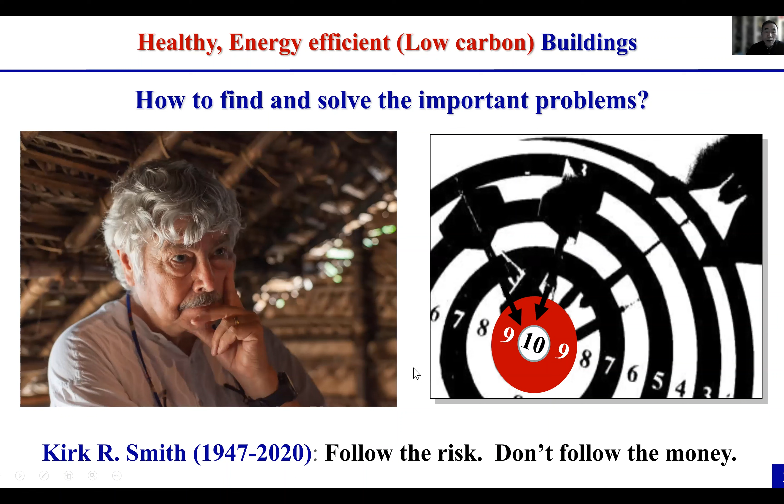There are three parts. The first part is background and problems. In creating healthy, energy efficient buildings, we should find and solve the important problems. How to find them? Kirk Smith said, follow the risk, don't follow the money.

In indoor air quality control, there are four fundamental problems. According to a paper published in Lancet 2020, premature death in China due to PM 2.5 and ozone is over 1.8 million, taking about 28% of the global value, ranking first in the world, and most exposure is indoors. In fact, there are more indoor air pollutants and more diseases. Therefore, the indoor air quality problem in China is a big problem.

There are four fundamental important problems. The first is what pollutants to target. The second is how to control them in design stages. The third, how to control them in the operation stage. The fourth, how to evaluate the effect of the control.

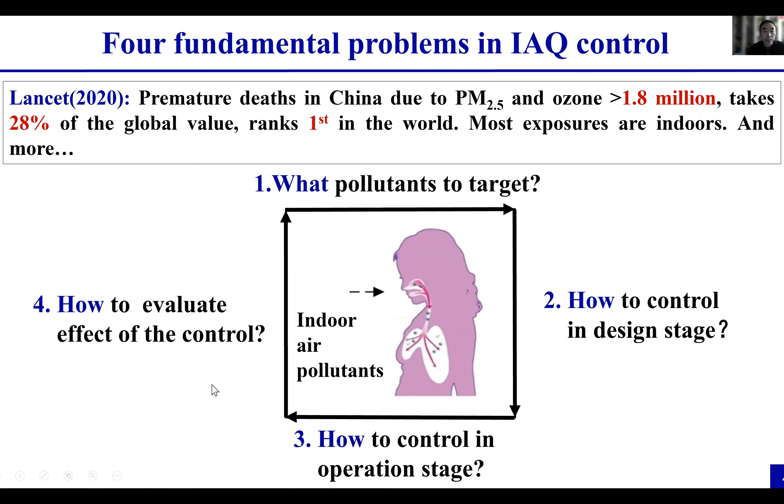The second part is research advances. For problem one, what indoor air pollutants to target? The China Indoor Air Quality Standard was launched in 2002. Mainly, it was based upon the WHO guideline and many standards or guidelines in developed countries. However, there are some problems. Why? Maybe they didn't match the Chinese situation.

In China, what indoor air pollutants should be targeted? We should understand the Chinese situation and Chinese indoor air quality problem. To address that problem, we put forward a method to use disease burden.

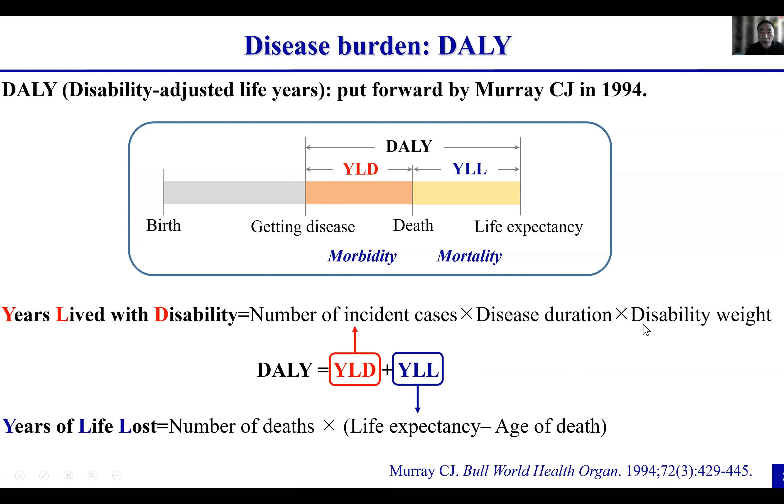And even if the person doesn't die, if he gets ill, it will cause some loss of ability to work. It is called years lived with disability, which equals number of incident cases multiplied by disease duration multiplied by disability weight.

We find the candidates of indoor air pollutants from the Chinese standards, air quality guidelines, and the indoor air pollutants with cancer risk data. This is the indoor air pollutants list.

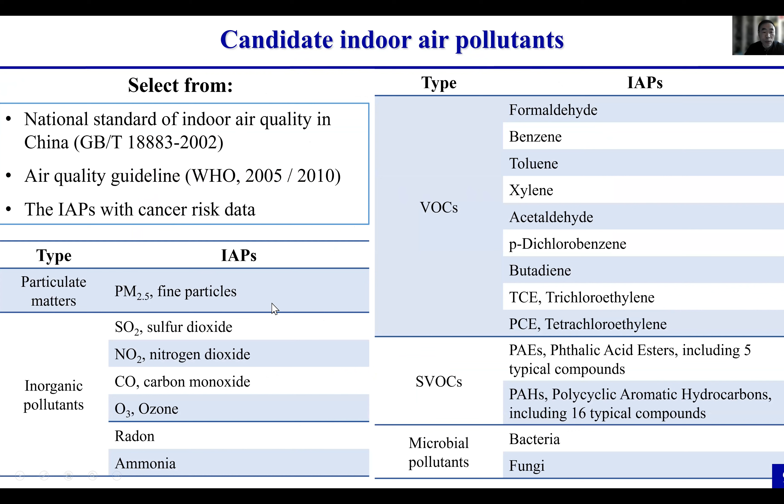At first, we did some systematic review. We dug out the data from databases, Web of Science, and so on. The period is from January 2000 to December 2017. Each paper only reported limited data. With this limited data, by using the Monte Carlo method, we can get the large scale or even the whole country exposure distribution. I will skip the details.

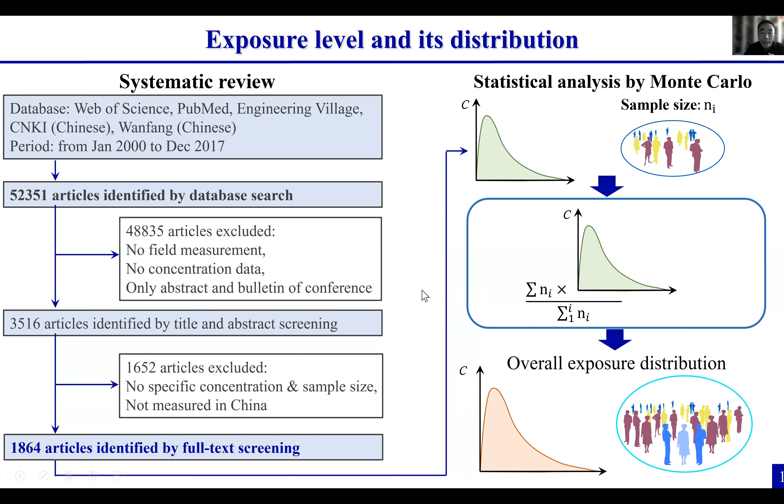From the literature, we can get the concentration and response relationship. For example, this is the PM 2.5 concentration response relationship. There are also relationships for many other diseases, for example, ischemic heart disease, lung cancer, and so on.

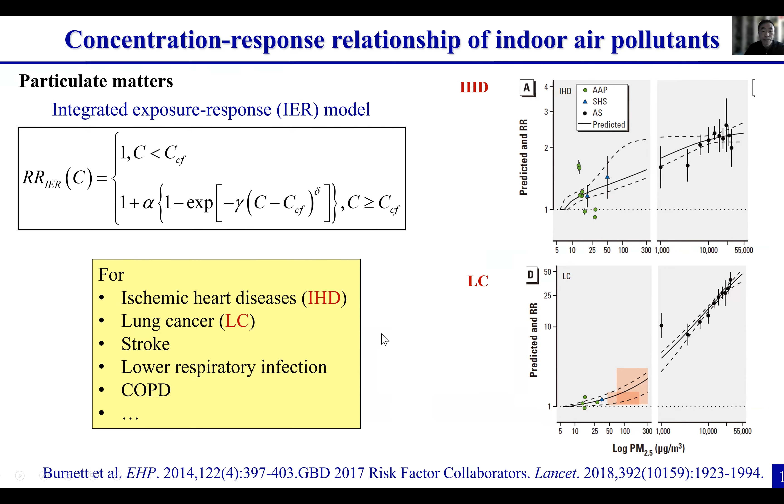After that, we can estimate the burden of indoor air pollutants in China and compare them to Europe and USA results. This is the China result. From these figures, it is seen that for the burden of indoor air pollutants in urban China, PM 2.5, benzene, SO2, NO2, and ozone rank top 5. This order is different from the results of Europe and USA studies.

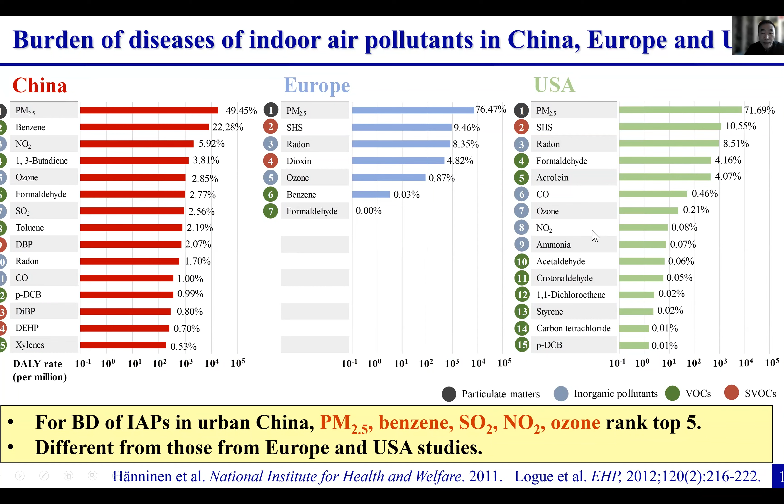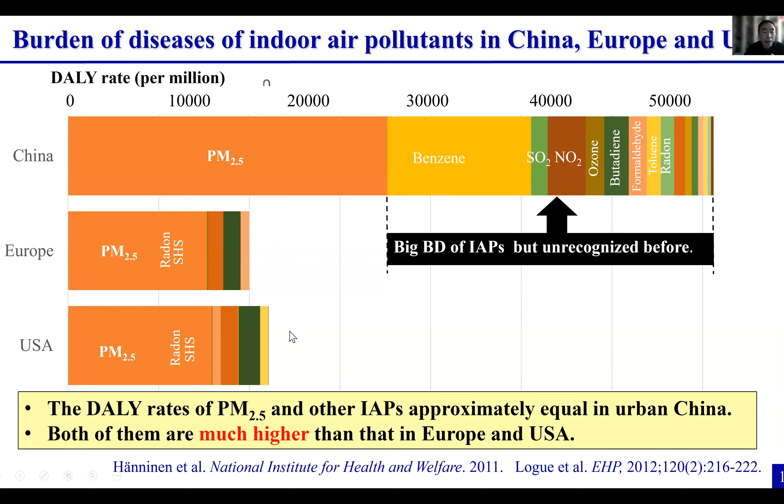Problem 2: how to control the indoor air quality in the design stage. There are several stages to control the indoor air quality: design period, construction period, and finish period.

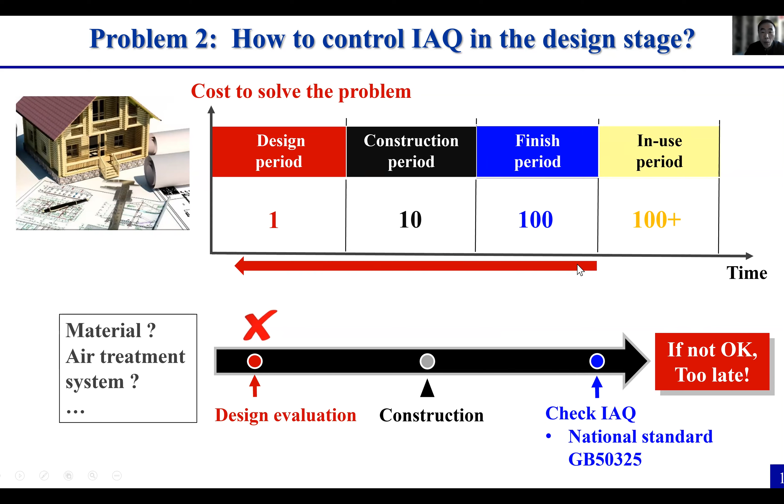If we can solve the problem in the design period, the cost can be very low. Therefore, we want to solve the problem in the design period by giving a design evaluation to determine what kind of material should be used, how much should be used, and what kind of air treatment system should be used. This way, we can solve the problem much earlier.

But in China, previously, they used the total concentration of formaldehyde and VOC. We think this is not right, because it is not directly related to the emission rate, and it cannot predict the indoor air pollutant concentration in a real environment. We found that we should use the emittable concentration, but in common conditions, the ratio of emittable concentration to total concentration is only about 10%, and it is not constant.

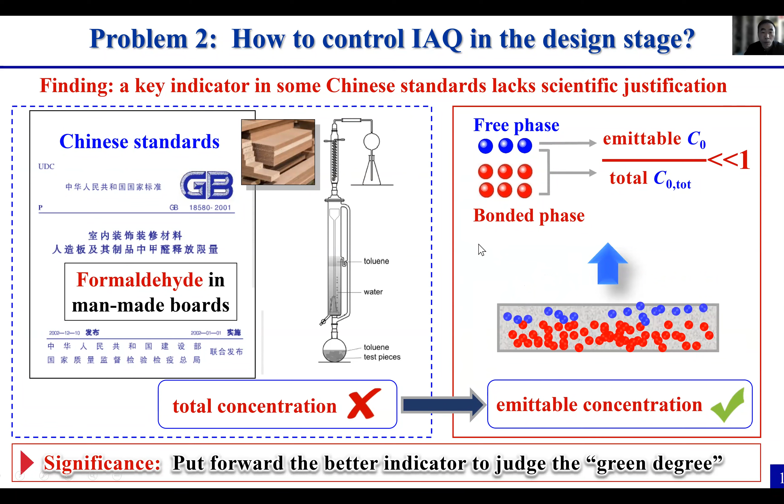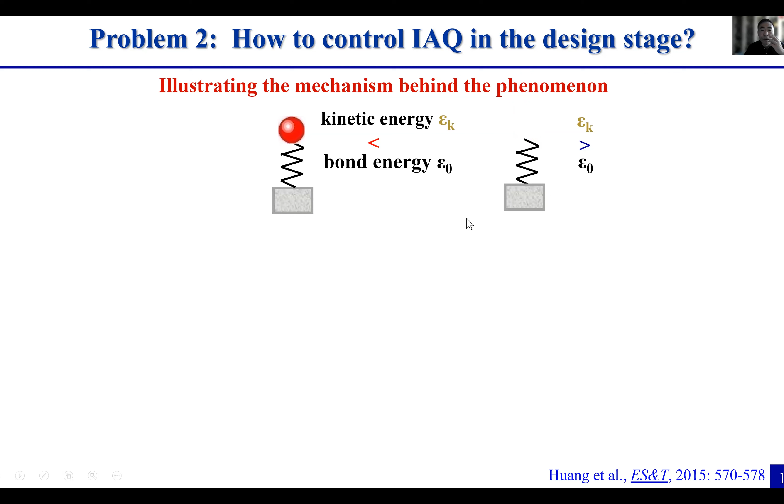Therefore, we put forward using the emittable concentration to judge the green degree, because only part of it is emittable. We found that only when the kinetic energy is greater than the bond energy can the molecule become emittable. By using kinetic theory, we derived an equation to get this ratio.

With that equation, we can know the influence of temperature on this ratio, and the results are validated with experiments.

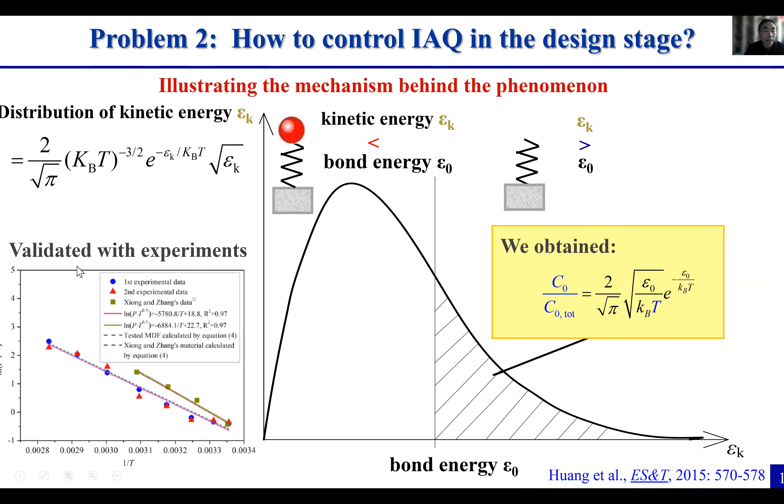To control indoor air quality in the design stage, we also need a method. Previously, the USA and European countries used a steady state method with ventilated chambers: put the building material into the ventilated chamber, then record the concentration curve. When the curve reaches approximately steady state, they can estimate the emission rate.

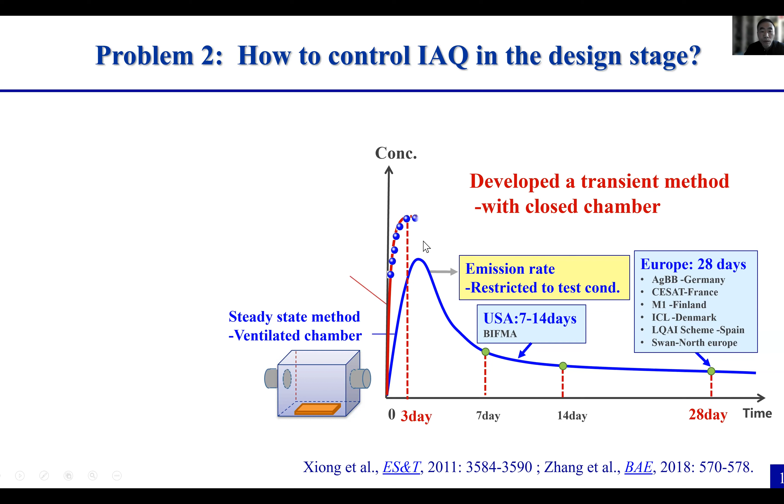However, this emission rate is restricted to the test condition, and it cannot predict the indoor air pollutant concentration in a real environment. Therefore, we developed a transient method with a closed chamber and derived the equation to predict the concentrations. By this method, we can measure the emission parameters, overcoming the limitations of the above standard methods.

In the USA method and European country method, the test time is quite long, from 7 days to 28 days. With our method, the time can be shortened greatly.

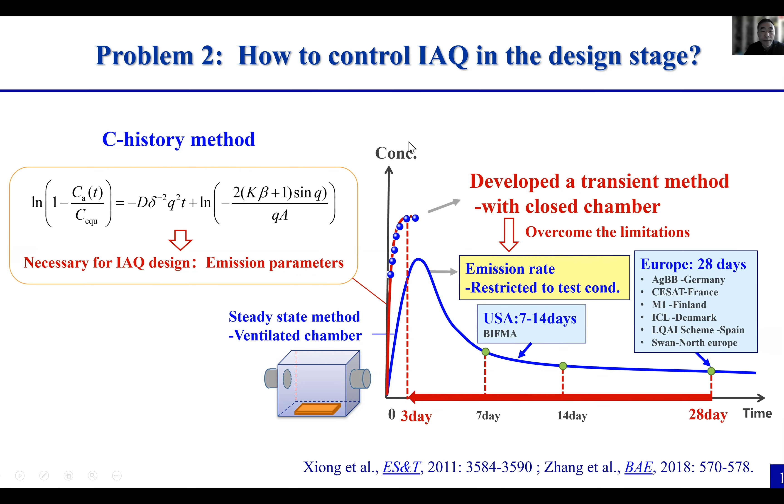We also developed or invented various C-history chambers: 30 liters to test building material, and 3 and 30 cubic meters to test building material and furniture.

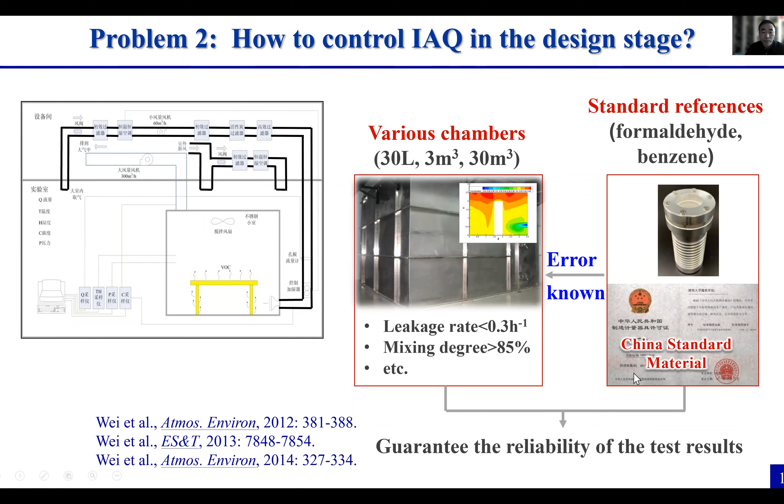We also invented standard reference materials for formaldehyde and benzene. It received Chinese standard material certification, which guarantees the reliability of the test results.

Based upon the C-history method, we added two standards. One is Chinese national standards, and the other is for the building material.

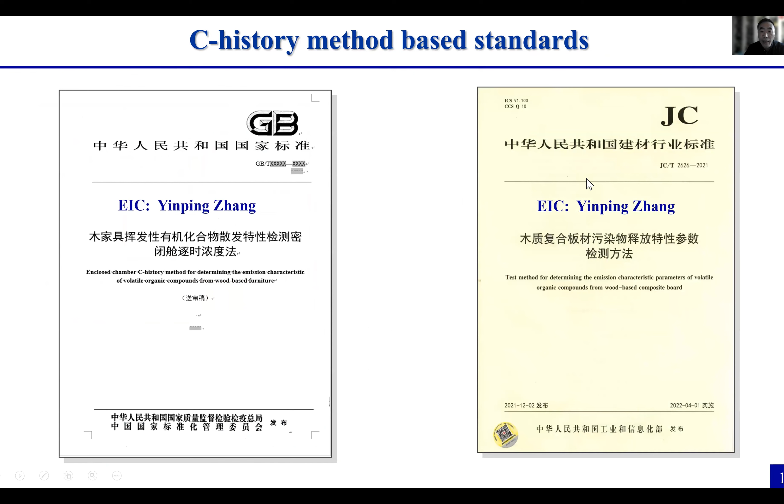The method has received good evaluation from Professor John Little, a USA Virginia professor. In the journal Building and Environment, he wrote a review paper with a separate section introducing our C-history method, and considers it quite convenient and time efficient.

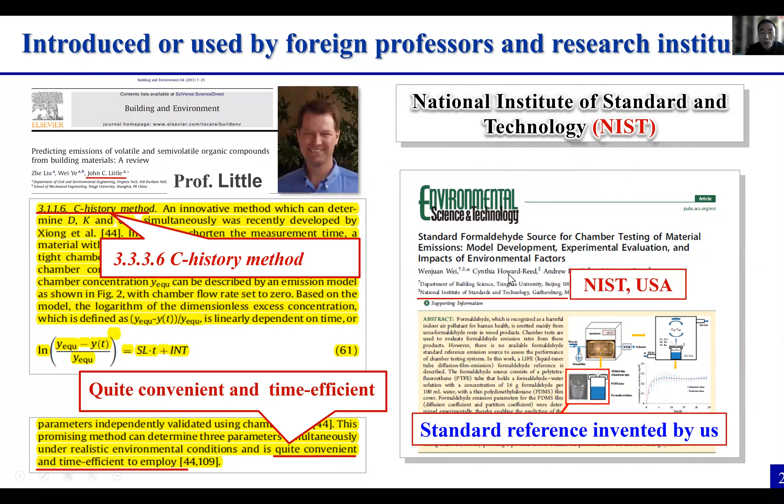The National Institute of Standards and Technology in the USA also uses our standard reference material.

We then prepared and developed software to estimate indoor air quality at the design stage. With the indoor material and furniture emission parameters input into the software, we can predict the concentrations for the targeted indoor air pollutants.

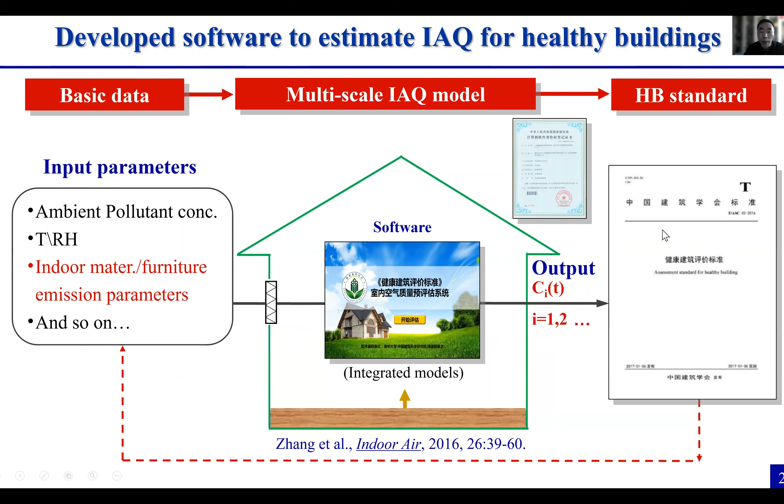By using the method, the data, and the software, we also had to prepare standards: the Chinese health building standard, evaluation standard, and also the indoor air quality assessment for public buildings.

We also developed software to design and score the indoor air quality. In China, health buildings are now located in over 20 provinces, and the building area has exceeded 30 million square meters.

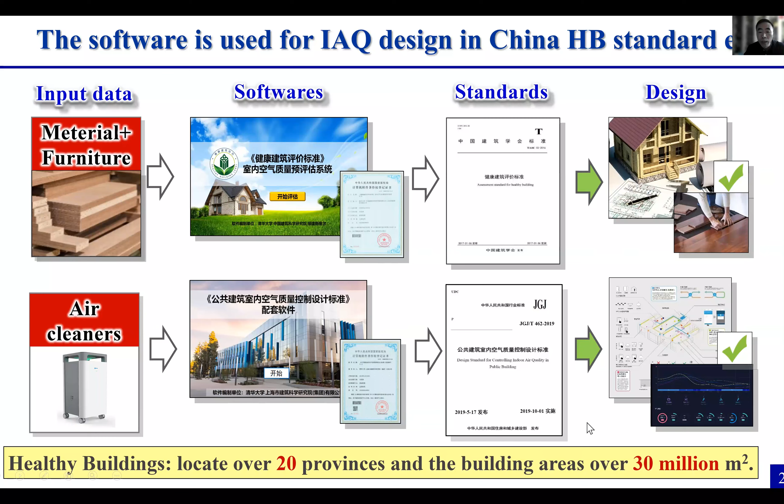Problem 3: how to find the most economic control strategies. For indoor air quality control, we want to control the indoor air from state A to state B. State A is not satisfied, and state B is the expected status. But the problem is how to minimize the cost. The cost can be energy consumption, carbon emission, or just economic cost.

By using the traditional method, it's impossible. Therefore, we developed a new method called the inverse problem method.

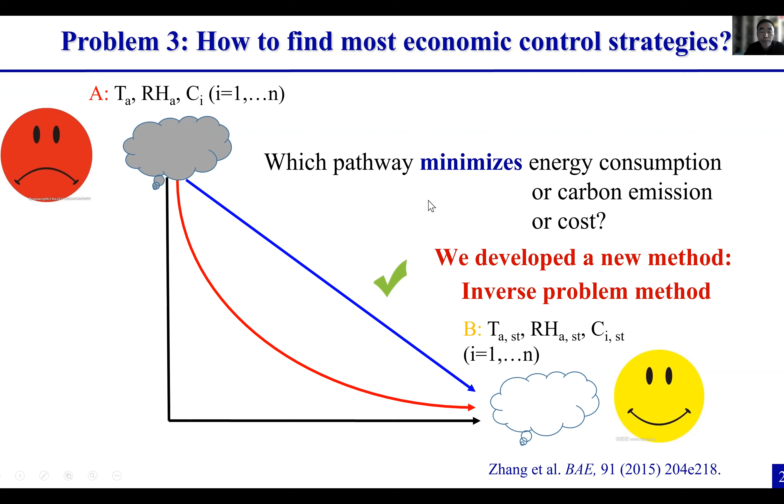The new approach can be illustrated this way. For the traditional approach, we know the given process and equipment parameters. We can know the temperature and the concentration of indoor air pollutants. Then we can know: is it satisfied, okay? If it is not okay, we should use an HVAC system and air cleaning system.

But if we want to get the expected indoor temperature and indoor air quality, what is the best process, devices, or control strategy? For this problem, we use the functional problem and inverse problem method. A functional's dependent variable is itself a function. In Chinese, it is called 泛函，和普通的函数不一样。That's why we have to use a functional problem with the inverse problem to solve this problem.

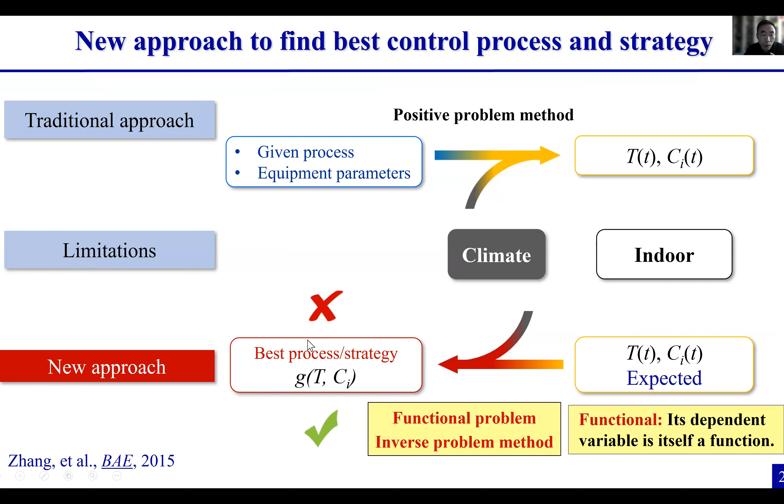I'll just give an example of how to use it. In China, especially for residential buildings, there are two popular systems. One is a mechanical ventilation system with filtration. The other is a natural ventilation system with an air cleaner. What do we want to optimize? We want to optimize the airflow rate for each system, that is, find the airflow rate for each mode.

What are the constraints? We have to meet the standards for temperature and relative humidity, and also the concentration of the target indoor air pollutants. What's the objective? We want to minimize the energy consumption. Certainly, we can also minimize the cost, depending on the users. We have to use the functional method I mentioned on my last page. This cost is a function of the determined function, that is the airflow rate, with the constraints.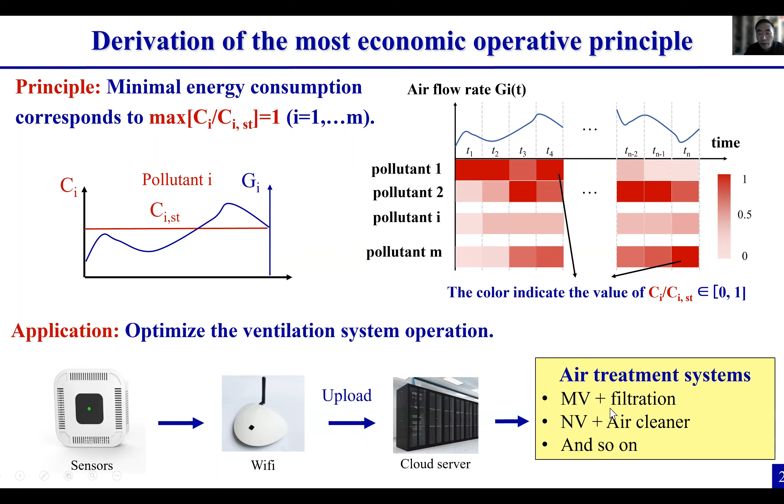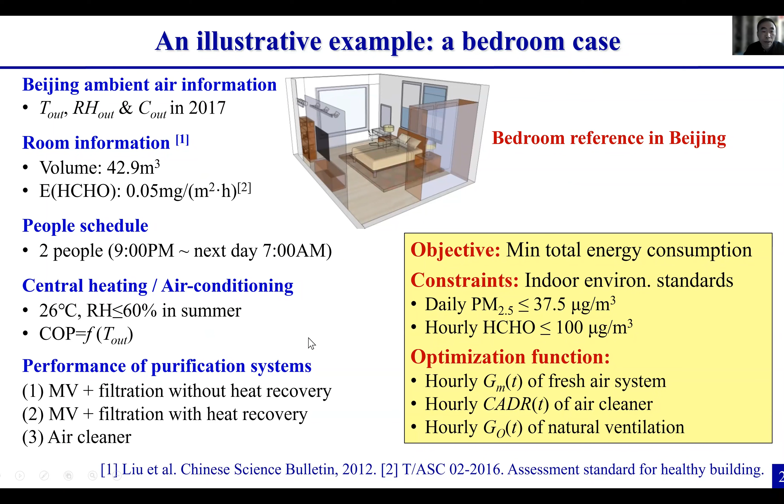Just to give an example, we consider a standard bedroom in Beijing. The information can be seen in our previous research article. Due to the time limitation, I'll skip the details and just introduce the result. After optimization, compared to traditional control, the energy consumption can be reduced by about 12%, and the cost can be reduced by 20%.

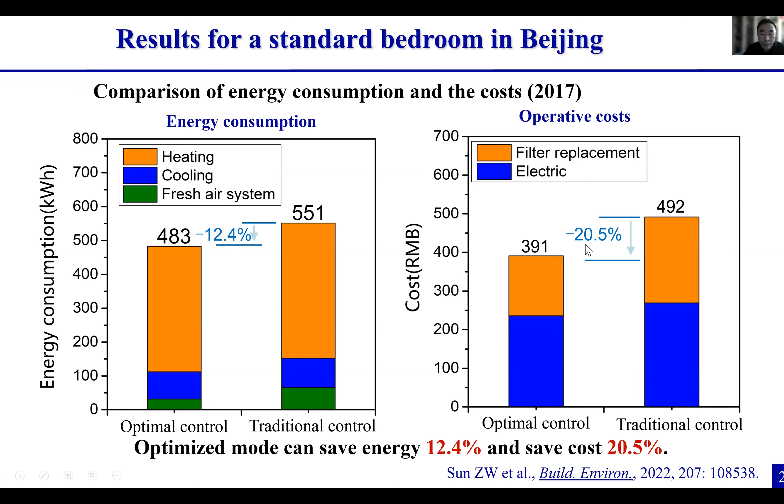Problem 4: how to evaluate the control's effectiveness. Usually, we only use the concentrations. If it is lower than the thresholds, it's okay. However, it's not enough. For indoor air pollutants, we can know the components and the concentrations. And by blood sampling or urine sampling and medical analysis, we can also know the indoor exposure, and whether people are sick or not. But what happens during this process, we don't know.

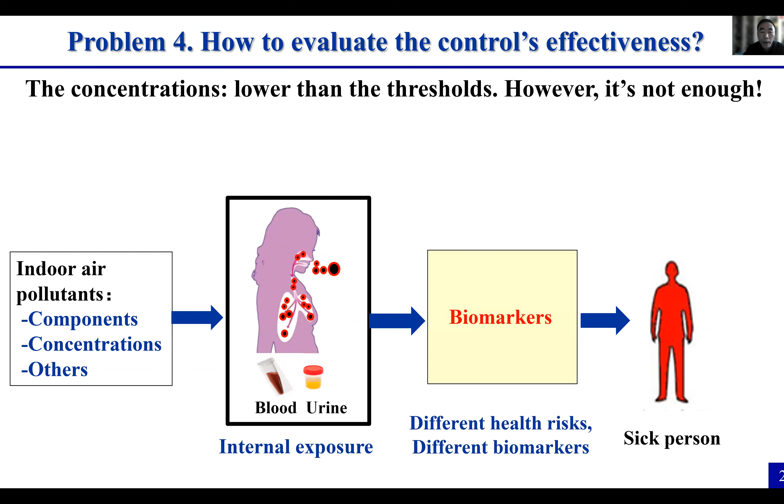How to solve that? We can use biomarkers. However, for different health risks, we have to use different biomarkers. By using biomarkers, we can know the biomarker level for the controlled or uncontrolled case, or for different control cases. From that, we can know how to control the indoor air pollutants. That is to say, we use the intervention and biomarker approach.

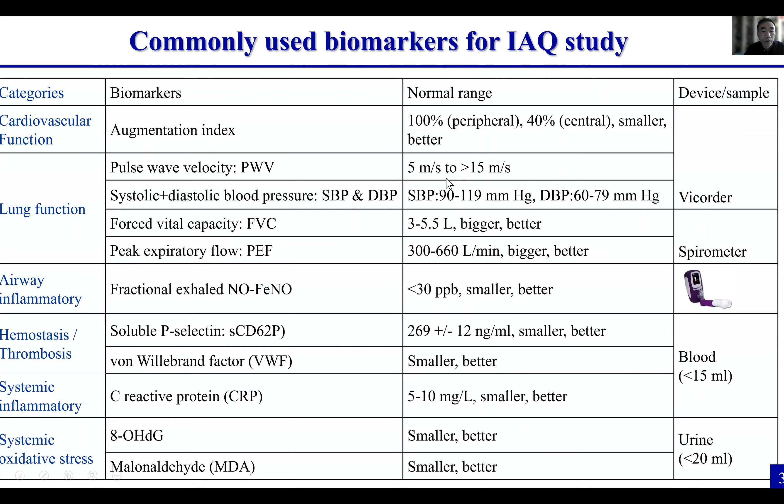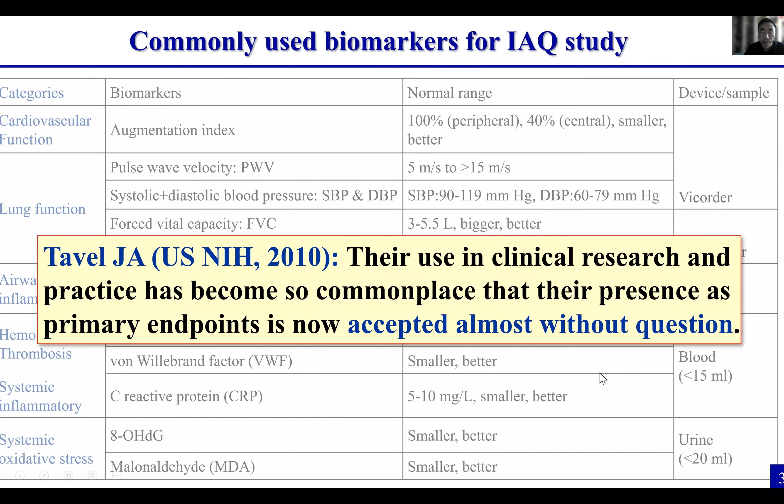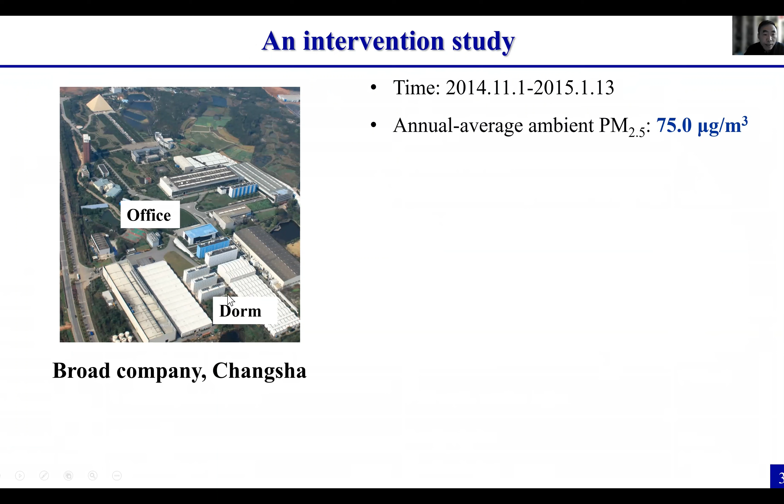These are commonly used biomarkers for indoor air quality study. According to the USA NIH report, their use in clinical research and practice has become so commonplace that their presence as primary endpoints is now accepted almost without question. We used that method to carry out an intervention study in Changsha, at Broad company. In the office and the dormitory, they use such an air cleaning system.

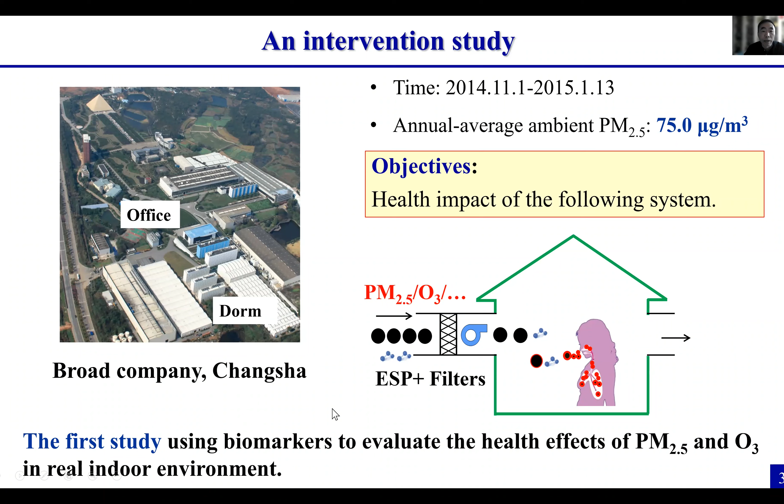The test period is during this period. The objective of this study is to study the health impact of the following system. This system uses the ESP with filters, and the ESP produces a little ozone. However, its concentration is still much lower than Chinese indoor air quality standards. This is the first study using biomarkers to evaluate the health effects of PM2.5 and ozone in a real indoor environment.

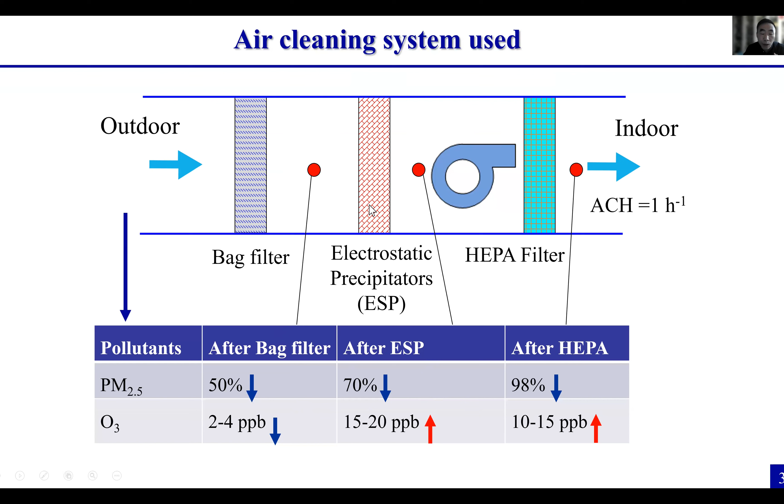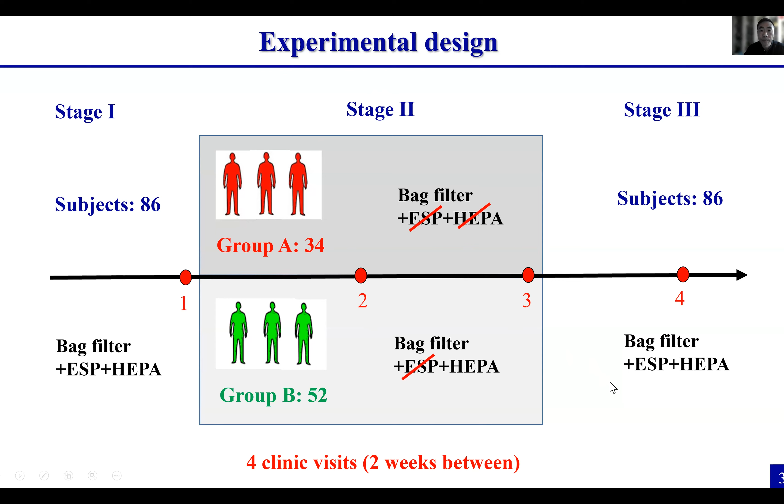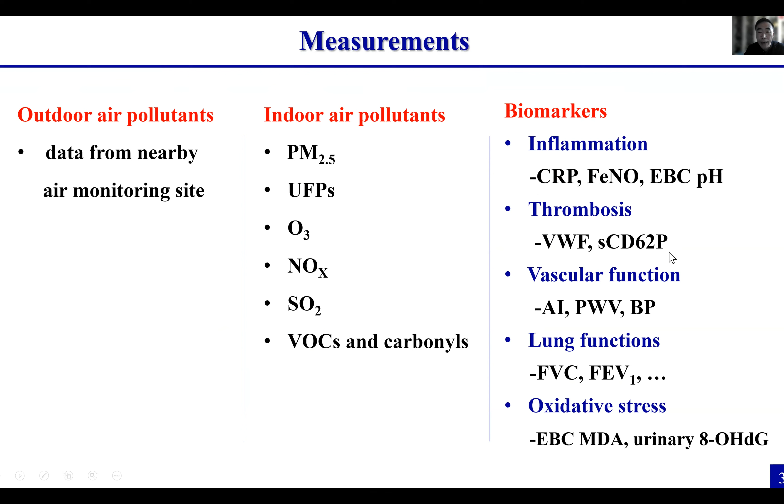For outdoor pollutants, we use the data from a nearby air monitoring site. For indoor air pollutants, we measure by ourselves. For different medical responses, we use different biomarkers. I skip the details. And we do some clinical visits.

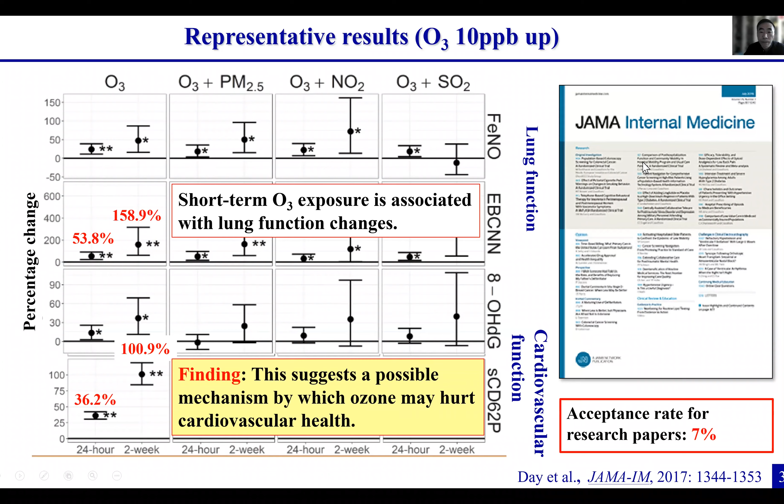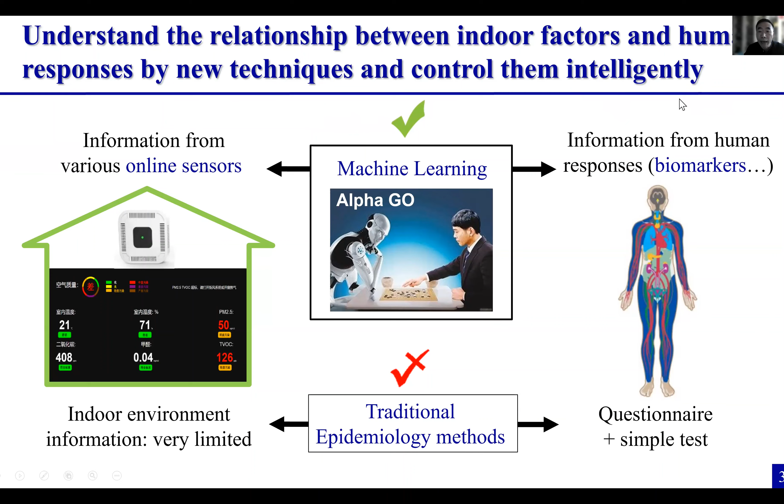Phase 2: so much data, how to digest them, how to analyze them. We can use machine learning or AI. By using this approach, we can understand the relationship between indoor environment and humans much better than traditional methods. And we can control them intelligently. How to control them intelligently?

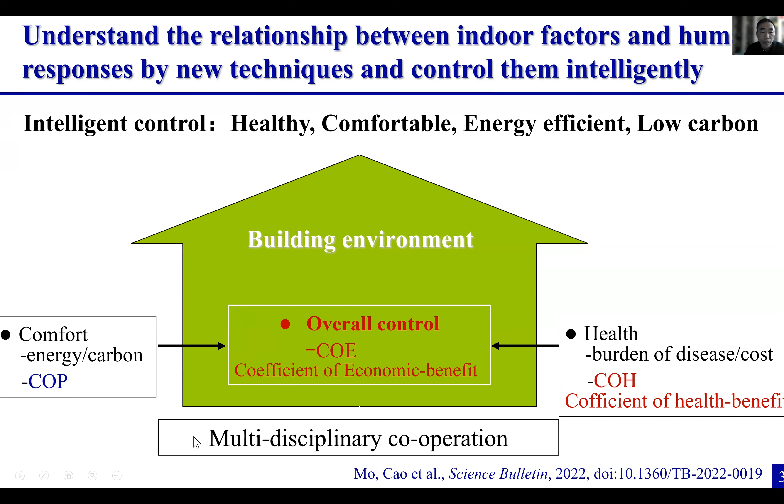But for the real building environment, we have to pay attention more. We have to do overall control, how to control, how to optimize the control. We put forward a new concept, COE, coefficient of economic benefit. Everything has to be put into money. We have to optimize the various controls based upon the economic benefit. Certainly, it needs multidisciplinary cooperation.